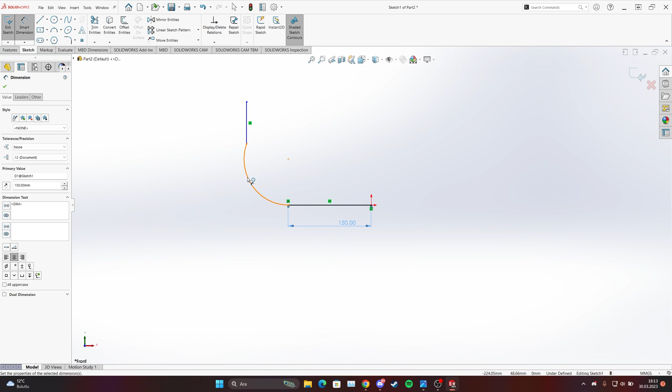Okay, let's see what we have over here right now. As you can see, from here for this line we have 150. So we will put 150 over here, and then we have radius, which is 260. Okay, we gave 260, and other side is also same. So 150 over here.

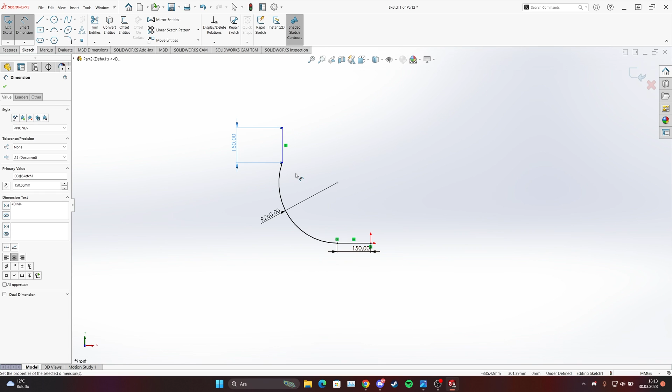But one thing right now, as you can see, this one and this one, we will make it tangent. As you can see, we have tangent over here, but we didn't have. So we have to make it, otherwise we will not have a proper line over here. Okay, we made this. And then what we will do? We have to make this circle over here, because we will make our bend.

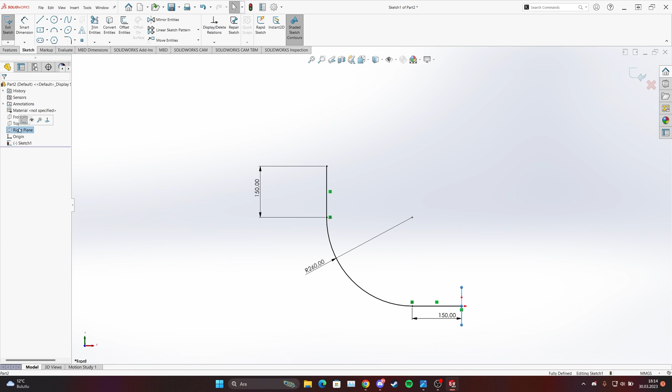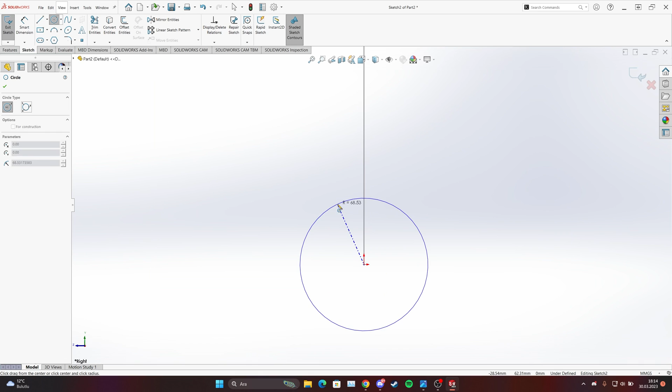So it's our path. It was front plane, and then we are going to right plane. Go to right plane and start another sketch. Come to here and let's check what we have. As you can see, inner diameter is 210 and outside is 290. So we will go and choose the circle, one for inside, one for outside. Click OK, and 210 and 290. Inside is 210 and outside is 290. Okay.

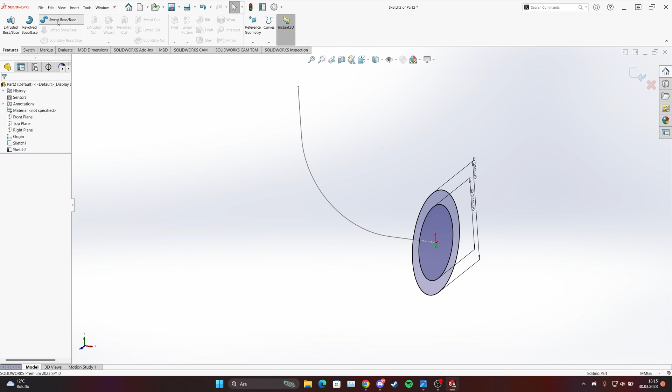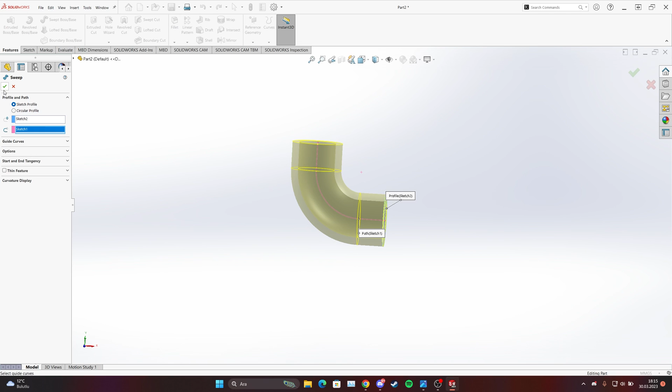Now as you can see, we have our path, and also we have two circles over here. What we will do, we will go to feature and choose our sweep. And then, as you can see, we have our sketch. It's like automatically it just came to here. You can see from here. And then our path is this one. And when you click OK, we have our elbow. Like that. Okay, next step.

We have to make our flange. First, we will make our flange to this side, and then we will put one plane from the center, and we will make it mirror. So what we will do, first we will make flange over here, and then we will make one plane to the center, and then we will just mirror.

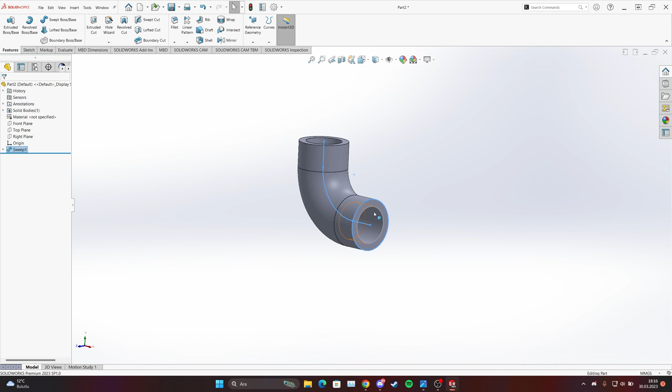So we can go this side, make it normal, and then just one rectangle over here. Go to sketch, choose center rectangle from here, and from the center point just randomly like that. And then let's check what we have. We have 360 over here, and other one is also 360. So they are both same. So what we can do, first way, we can give 360 over here, and also with the smart dimension we can give also 360 over here.

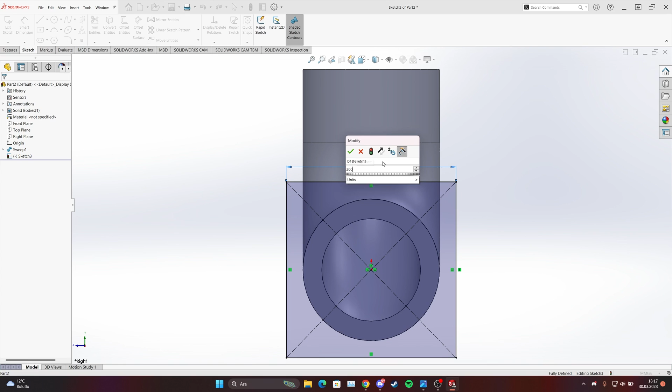But if you do that, for this part maybe it's not a problem, but in the future, when you're doing complicated projects, if you want to make a revision, if you want to change this dimension, let's say 400, you have to change two times because you gave it two times. So what we can do, we can just delete this, left click to this line and control button on the keyboard, and then left click also to this one and make them equal. So when you change this dimension over here, let's say 300, as you can see, it's also changing because they are equal.

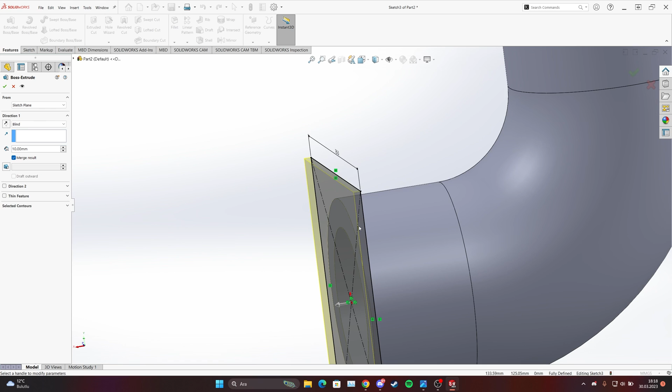Okay, we made this 360, right? And then, as you can see, if we make extruded boss/base like that, it's closing the inner circle. We don't want this, right? What we have to do, as you can see, right now we are on this sketch, right?

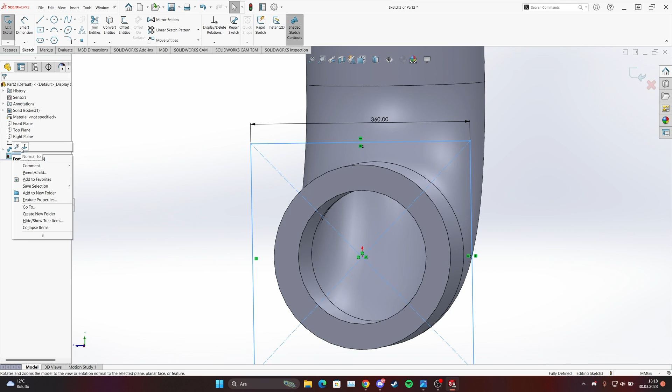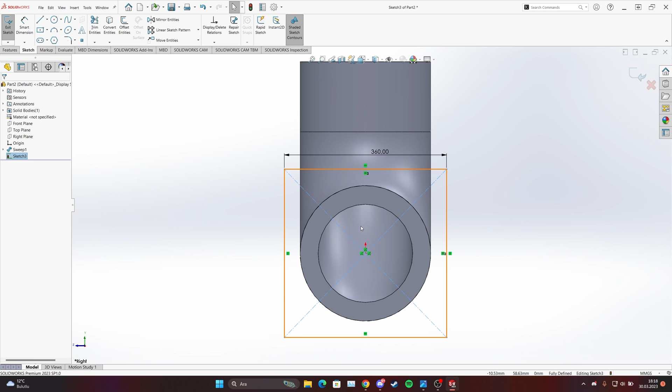And first way, from the center you can make a circle and put the diameter according to this. But the other way, as I told you, if it's something complicated in the future and you want to change the diameter of the circle, you have to change this one also because you made it from a circle. So what we will do, we will choose convert entities and we will just choose this corner. Now as you can see, it's on our sketch.

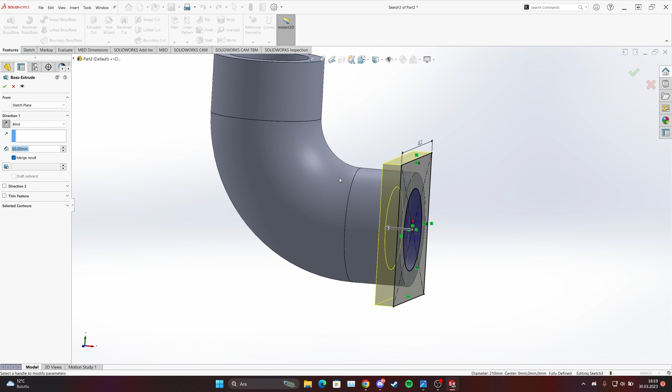And then we will go to feature, and then what is our thickness? We have 50 millimeters of thickness. You can see better from this side. Change the direction and give 50. And don't forget to merge the result, so it will be just one piece. Okay, we made it right now. And then make it normal. What we have? Next one. As you can see, we have holes over here.

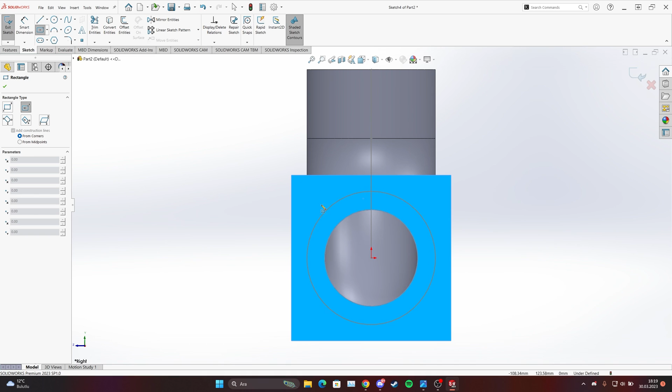So what can we do for this? We can use hole wizard, but for this we need reference points. So we can go to sketch, center rectangle, go to center, and put something like that randomly.

Let's see what we have. As you can see, we have 260 and the other side is also 260. So we will give this 260, then left click and control to select this one and also this line, give the relation equal, and click OK. When you change this, it will automatically change the other one too.

Okay, we made it right now, yes? And then you can make this one for construction. You can choose all of them and make them for construction.

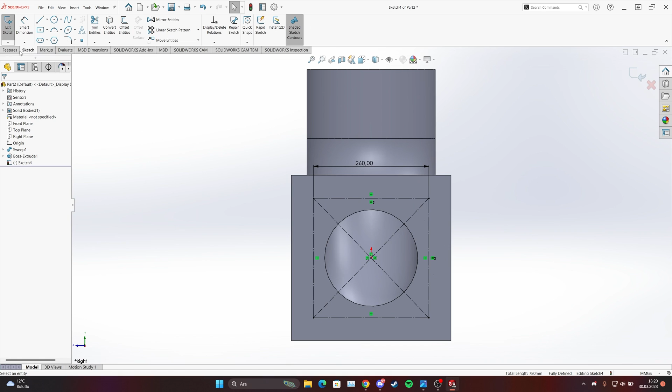And then we will make our holes. Exit from sketch, go to features, hole wizard. Let's see what we have. As you can see, our hole has inside and also for the head.

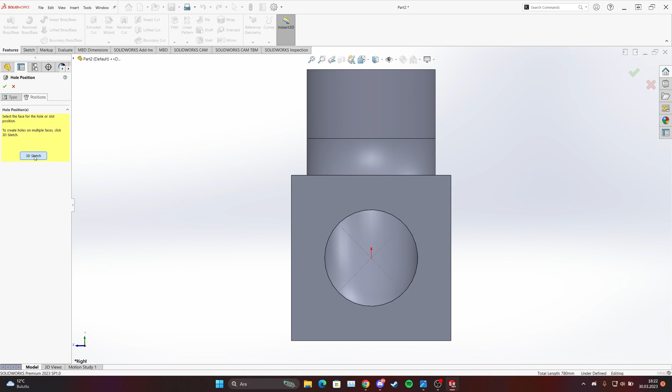And then go to position, choose 3D sketch, and come to this point, to the construction lines. Choose the corner, and then click OK. As you can see, we have our hole right now.

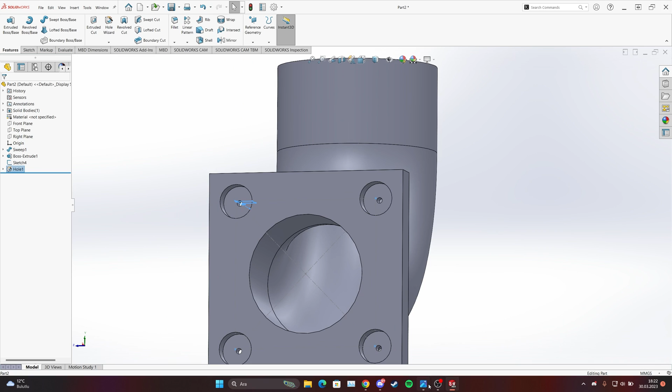Yeah, okay, it looks fine. And then what will we do? We made our hole, we made everything, but before making a mirror from this face, what do we have to do? We will make our fillet, right?

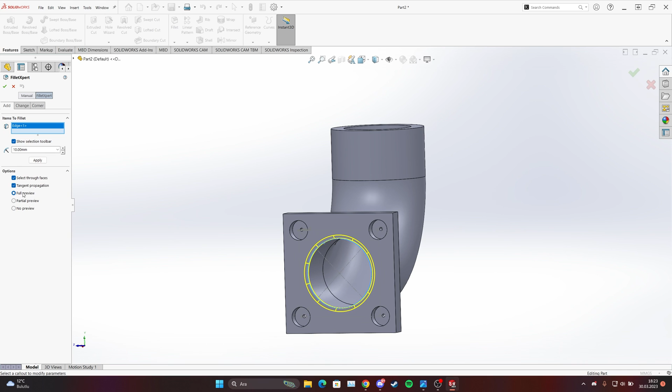We have one over here, and this is 10, so we will choose this edge and give 10. Look, when you choose the line inside this circle, if it's not showing on your model, it means you don't have any preview. So if you make it full, you will see how it will look.

Okay, and then what else do we have? As you can see, on the corner we have radius 20, so we will also make them.

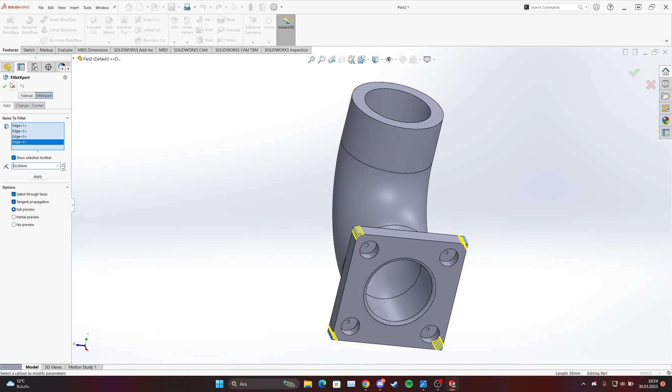You can choose this one, just left click. You don't have to go to features, just left click, and as you can see, you have fillet. This one, and also you can choose this one from here. Okay, we have it right.

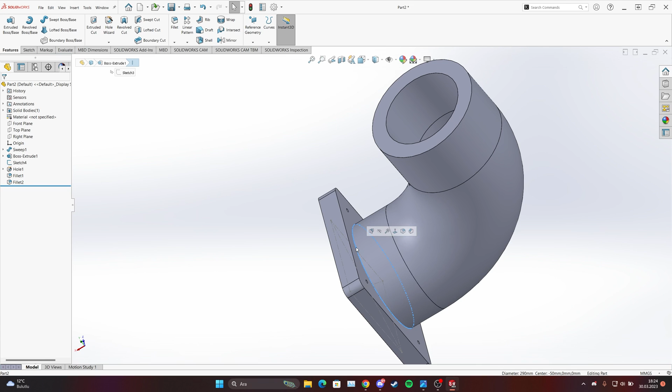What else do we have? Let's check. As you can see, we also have a radius over here, which is 10. So choose this one, give 10.

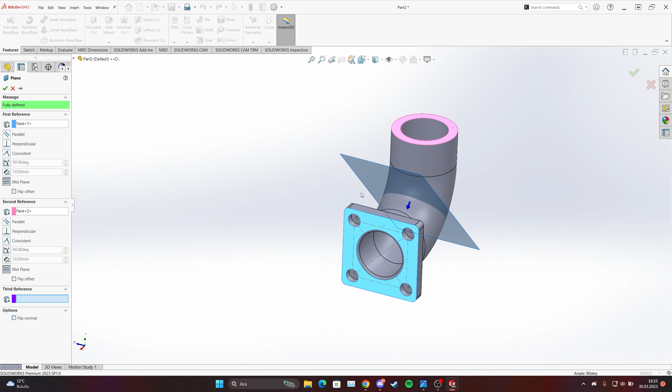Yes, and then what will we do? Go to reference geometry and choose the plane, choose this face and also this one. So we have our plane over here. And then what will we do? Now it's time to make a mirror from this.

Come to mirror and choose our extrude from here. Oh no, we have to choose the plane first, right? Choose the plane, then features to mirror. Choose this one, and also we can choose our fillet.

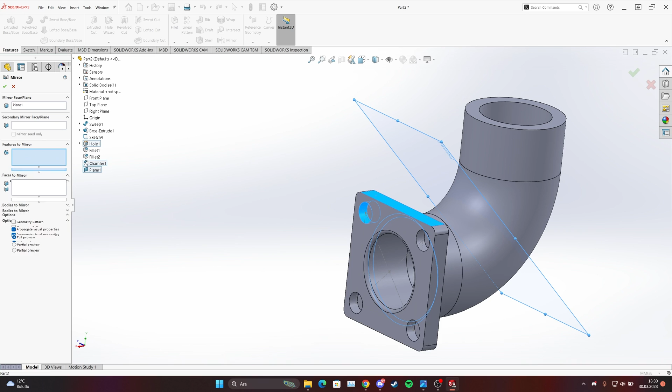Okay, we made them right. And then just make the fillet again one more time. When you click once, you could make mirror from this also, but I wanted to show this. Let's try together one more time.

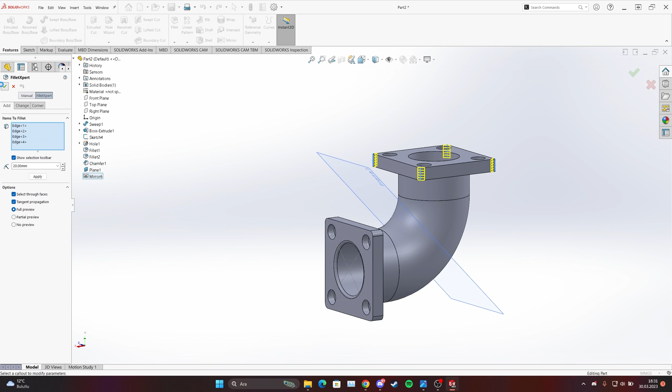When you click once, you have these options. As you can see, it will automatically choose these ones too. Okay, click OK. Then choose this one and give also 10 millimeters, and don't forget to give this one 10 as well.

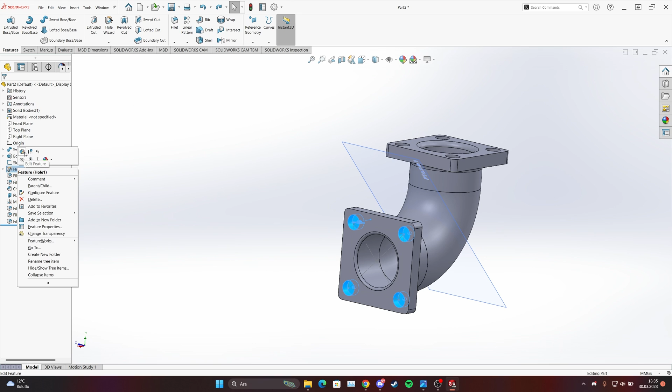Okay, we have everything right now, but we have one problem - we gave the wrong dimension to the holes. So what will we do? We will go to hole and edit feature. Let's see what we have.

As you can see, 60 - outside diameter is 60, and inside is 30. So this one will be 60, but this one will be 30 millimeters. And then we have our depth - as you can see, it's not going to the end clearly, so we will make it 100.

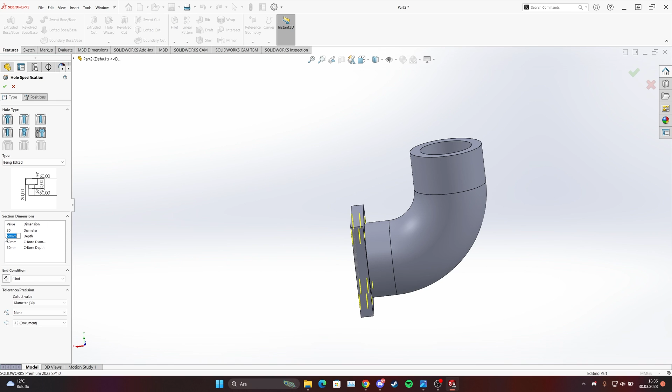And then we have our depth, and as you can see, we have 10 millimeters. When you do that, now we have the correct one.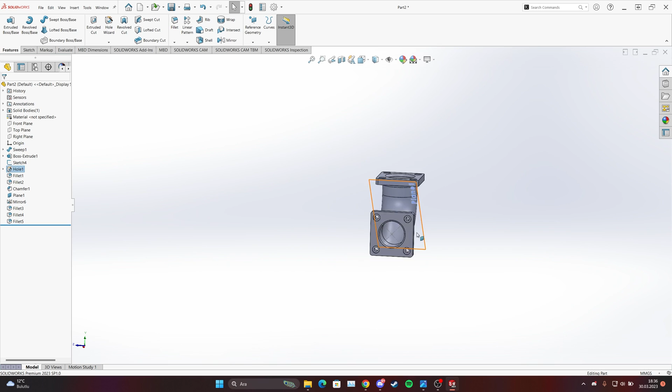And then we can just hide the sketch from here. Not this one, not this one, this one - hide this one. You can just collapse if you want, and hide this plane, and then we can just give good colors. I don't have anything actually.

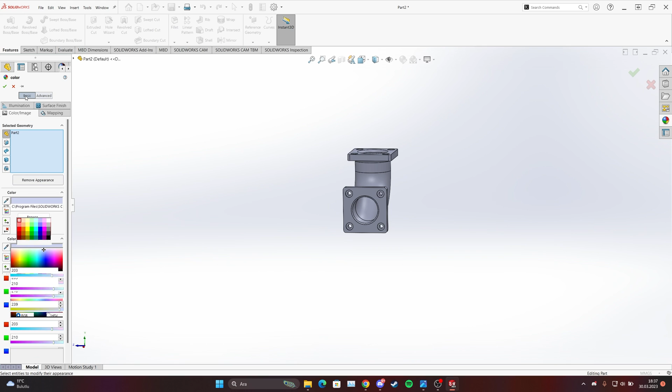Just... no, no, something just normal. Okay.